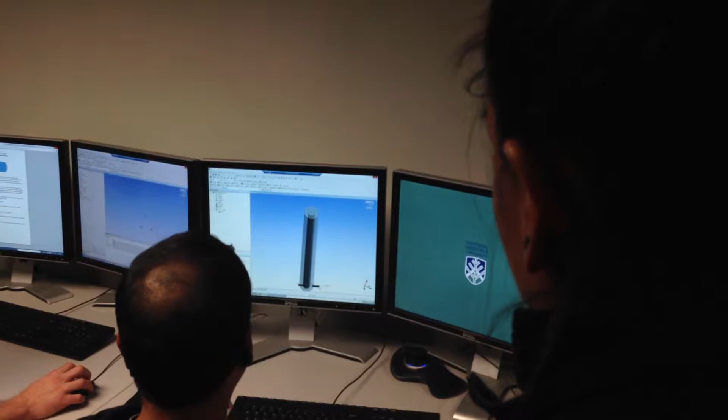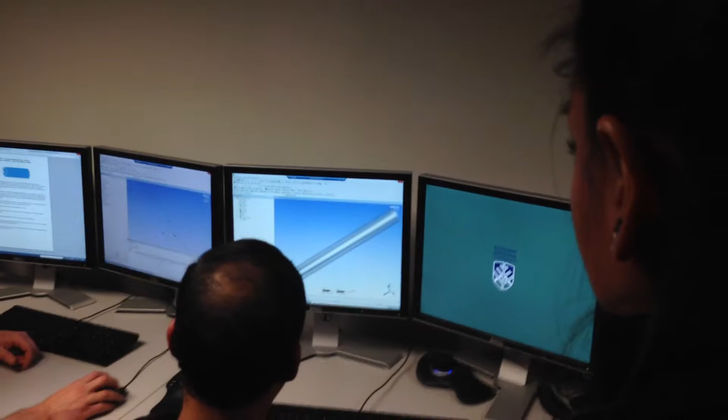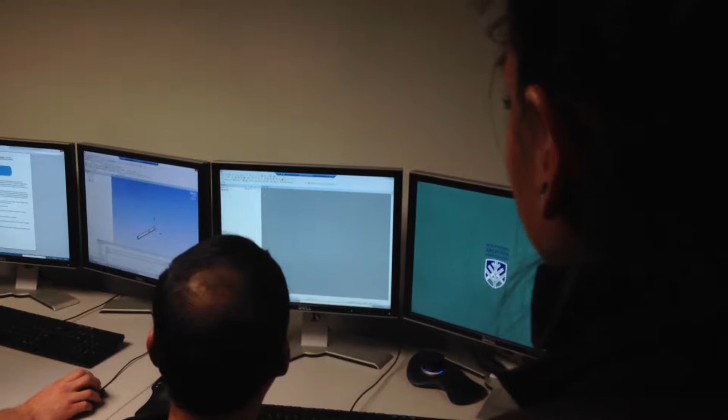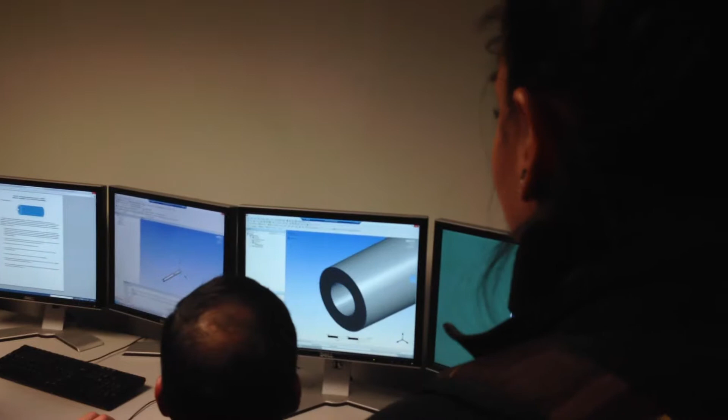Anyways, so our kind of introduction... bad view angle? No, I can see it perfectly. The introduction should be, that's what we do. Yeah, there's a competition, it's so easy when you do everything.

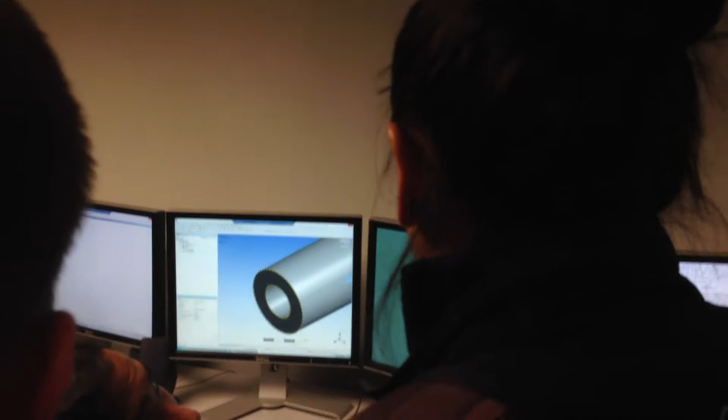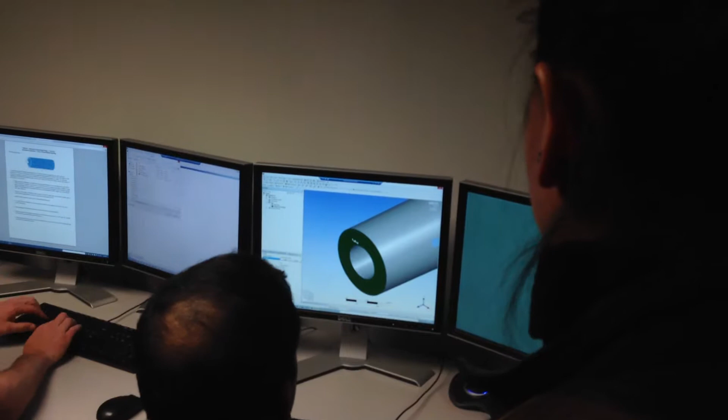And then for the mapping, I select this face. Okay, so you do that. And say apply.

All right, so I'm doing the Fluent one. So choose the double precision.

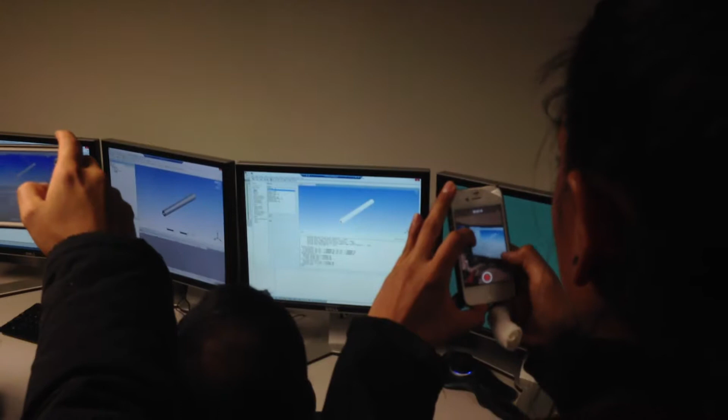Check the mesh just in case. In the models, use the energy model, energy equation. For the materials, you have to add copper. Go to the Fluent database for the solids, there is copper already there. So copy the material, but you have to change the thermal conductivity to 50. So 50, change, close. Then you can see copper and aluminum both coming in here.

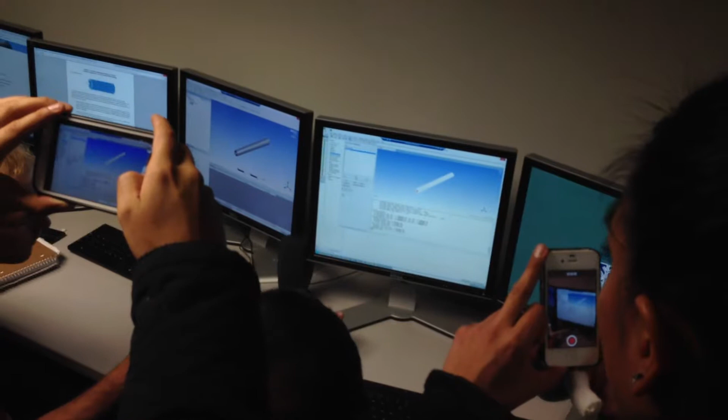And then you have to go to the cell zone conditions. You have to have two materials in here, a solid and fluid separately showing here. If you did not define them as two different materials in your design itself, it will just show up as one single material here. So you have to do that on the design side before even doing the meshing.

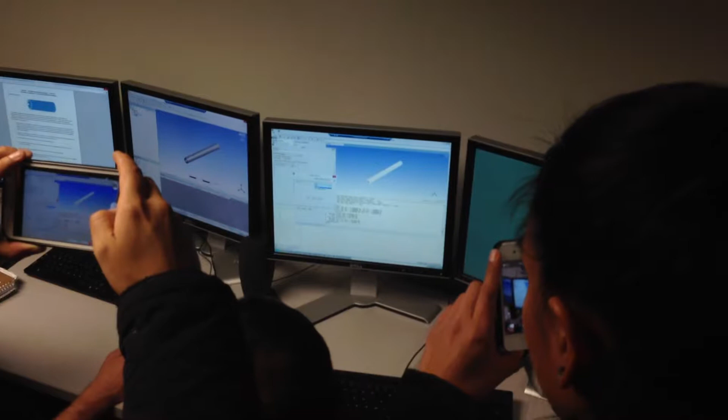So for the solid, we have an internal heat generation which we define here. Edit this thing and make sure you select copper, not aluminum. And then if you click on the source term tab, it gets activated. Edit, create one source term at a constant value of 5000 watt per meter cube.

For the channel, the default material is already air and we don't have to modify anything. So just leave it like that.

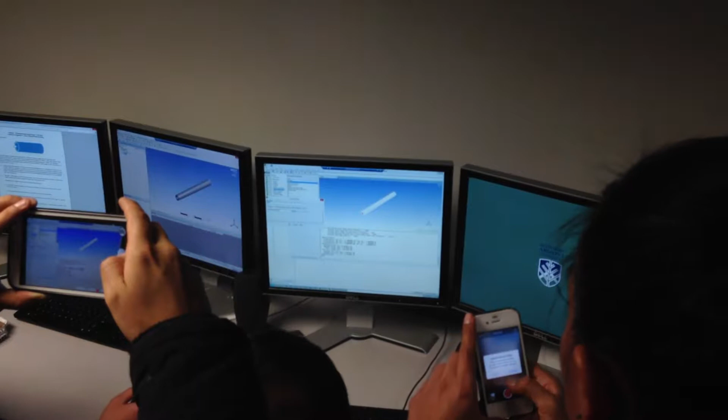The boundary conditions, the only boundary conditions you have to give is inlet, which is 0.05 meters per second at a temperature of 298 Kelvin. And the exterior, where you are defining the convection, 10 watt per meter square Kelvin, free stream temperature of 298. You should not define the heat generation here, this is the boundary heat generation. This is not what we want.

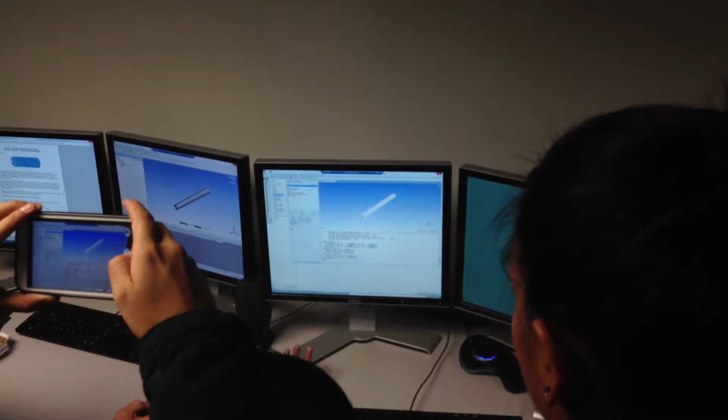Everything else is automatically taken care of, you don't have to change anything. The default values are already in there. And then the next thing is looking at the monitors, changing the residuals to 10 power negative 6.

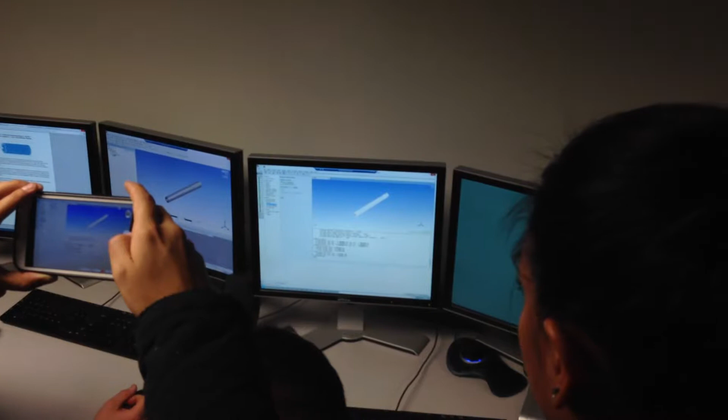The energy residual is already at 10 power negative 6, so you don't need to worry about that. Initialize the solution with standard initialization from the inlet - you can see the inlet values. Then run the calculation, using about 200 iterations. It usually converges within 160 or 170 iterations.

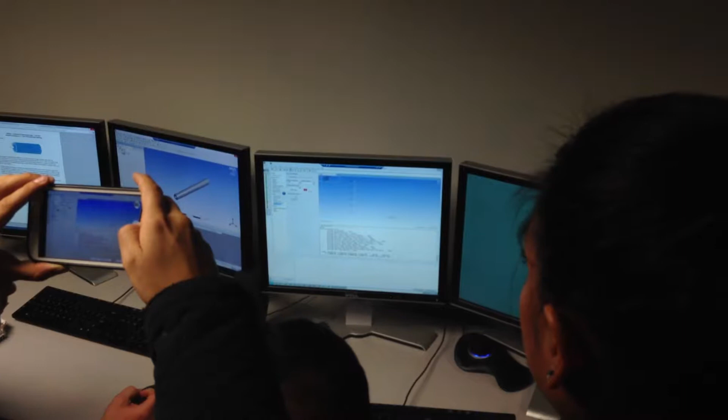Well, it's only been a few iterations, it's not there yet. That's what it's like - oh no, that's fine. It's not supposed to be that close, but...

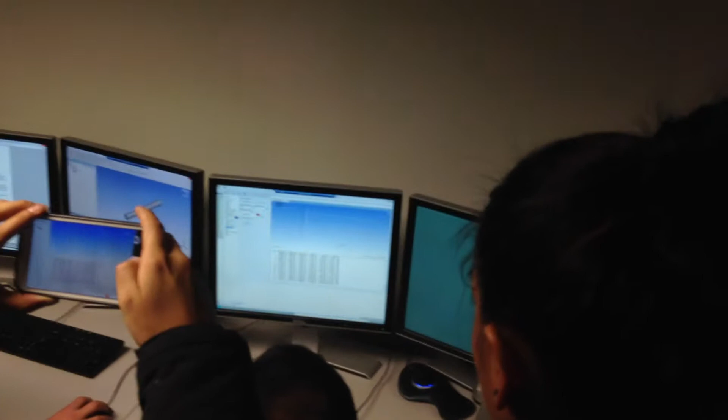You want to make it state of the art. I'll just wait until it reaches 10 power negative 3, not 10 power negative 6, and stop the calculation. But you have to make sure that the solution is converged - all these lines will go below 10 power negative 6, and that's where the solution stops.

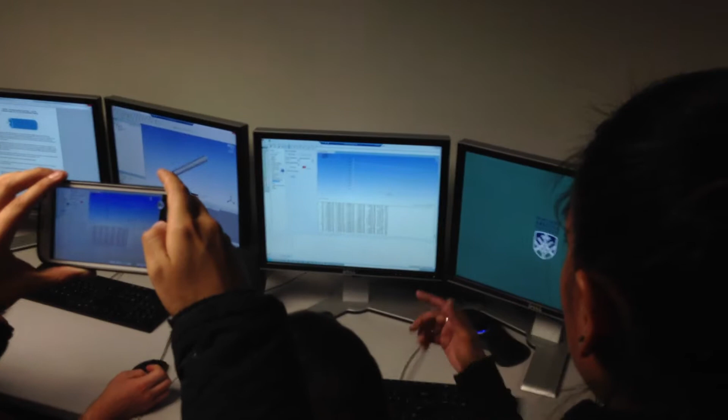So basically what the software is doing is trying to calculate the conservation of mass, conservation of momentum in 3 different axes, and conservation of energy in every element, making sure the errors fall below 10 power negative 6. That's why it does multiple iterations for each calculation.

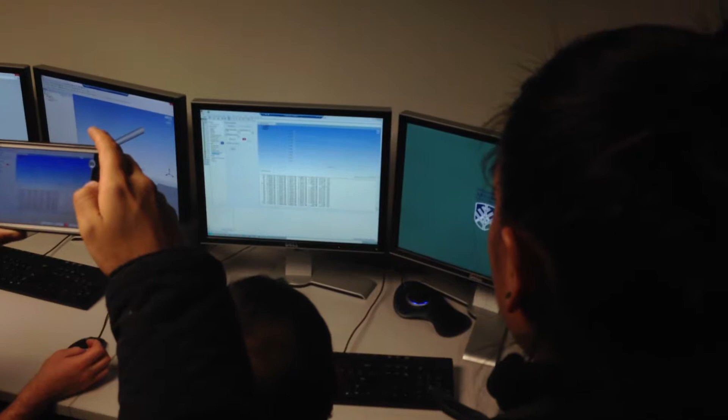One more thing - if it so happens that the solution just continues without going down, becoming like a flat line, something is wrong and you have to stop it there, or else it will never converge. But right now you can see the numbers going down, so just let it continue.

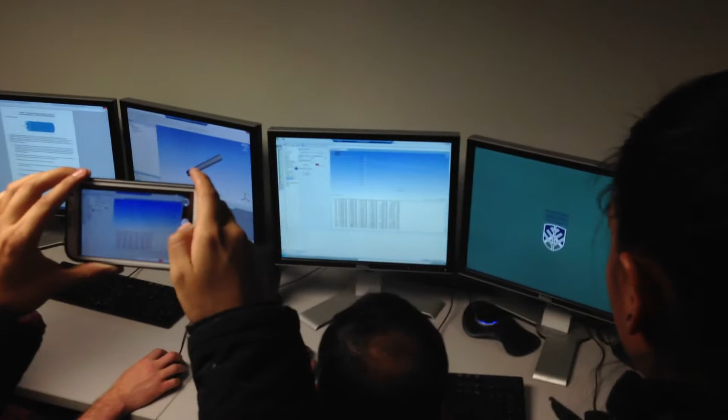Alright, I'll just stop here. I'm assuming the solution has converged. The next step you have to do is look at your solution using graphics and animation.

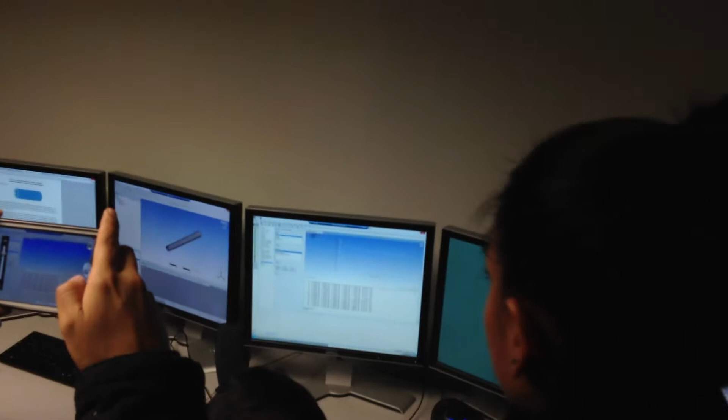Remember, this only gives you good pictures, but it doesn't give you any quantitative results. So if you just want to see how the profiles look, set up your contours, and if you're interested in the temperature profiles, select temperature. You can use the filled in option and select which objects you want.

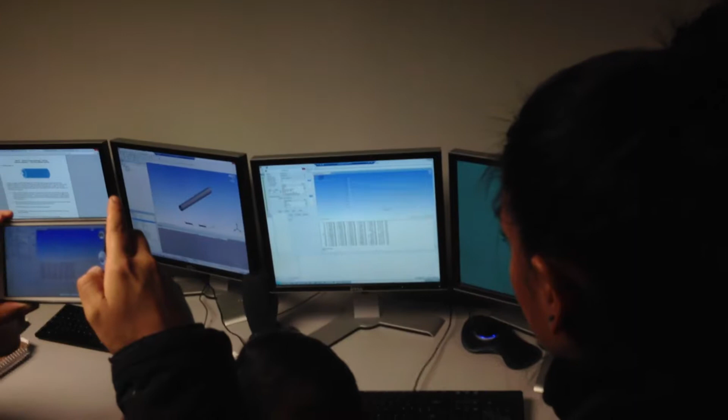The first tab selects all of them, and the second one unselects all of them. So if I'm only interested in the channel or only the solid, I can select only the channel and ask it to display - it will show only those profiles on the display.

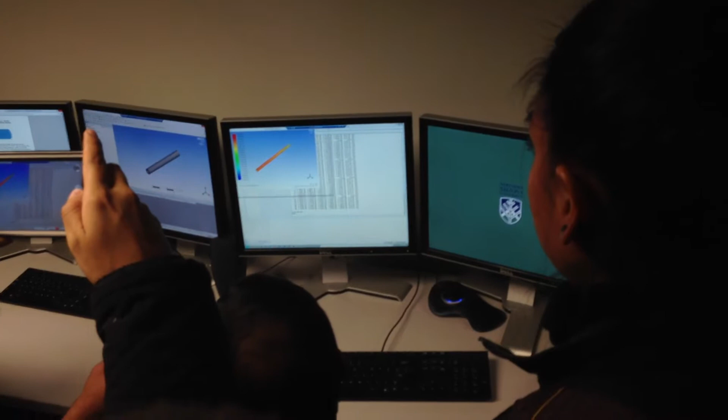There is one way you can maximize this view. If you go to view and unselect the embed graphics window option, it will create a bigger window. You can maximize this and take a good screenshot of it.

So if I select all of them and ask it to display, this is what the temperature looks like. Essentially it's telling us that this whole cylinder is pretty much at the same temperature - it's almost behaving like a lumped system.

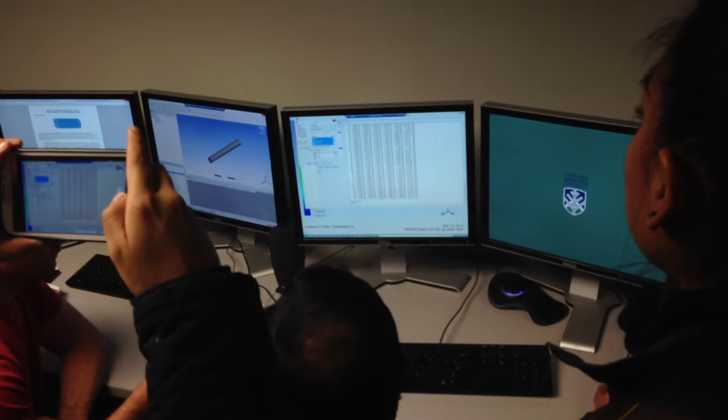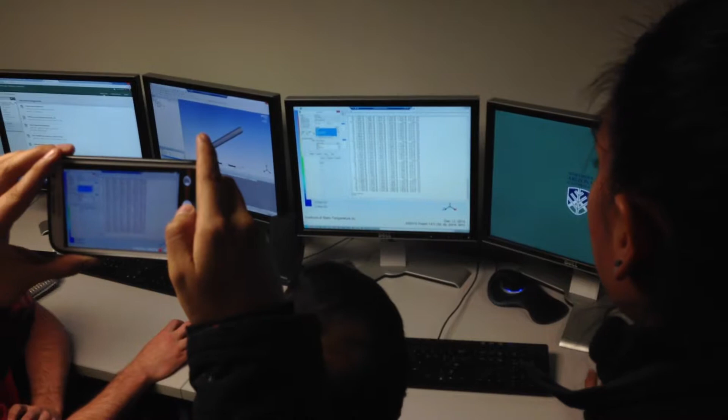In the example I gave you guys, I showed only one plane where the temperature profiles are defined - the middle plane. If you want to get a picture like that, you have to create that particular plane. Right now we don't have that middle plane.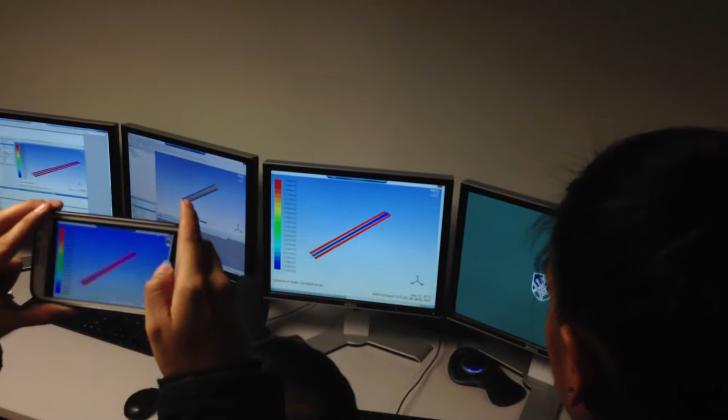So unselect all of them and just select the mid plane and ask it to display. You can see the temperature profiles coming only on the mid plane. And in my example, I also have the whole cylinder shown as an outline.

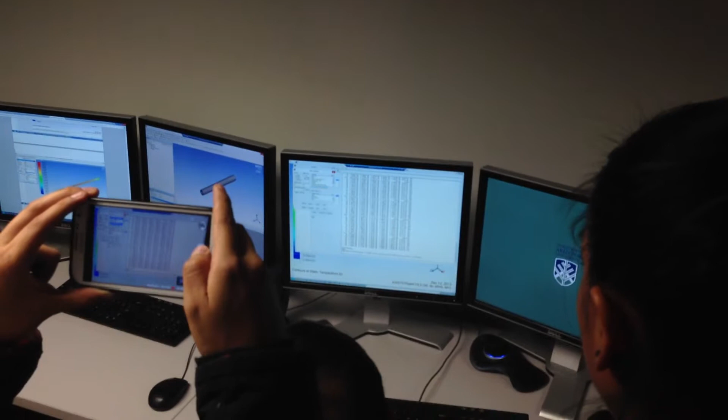You can create that also in your Fluent setup. In order to do that, you select draw mesh, and when you get the meshing window, select outline and select only the exterior.

Basically I'm selecting all of them and unselecting the ones I don't want. So I'll select the main big ones and ask it to display once - it will show you how it's going to look.

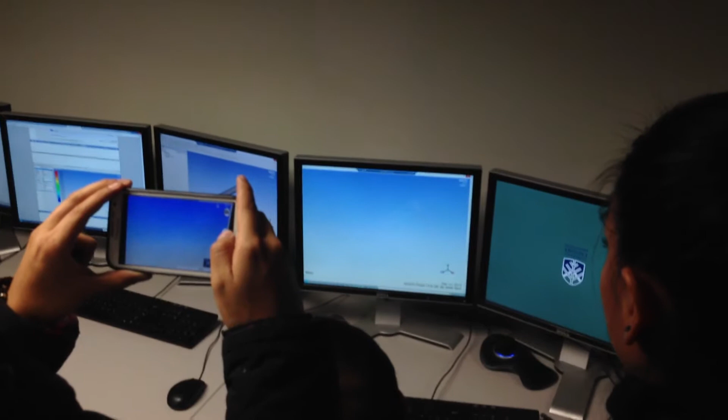You can modify it if you want, but if I'm satisfied with this, I'll say close and go back to the original contour window and ask it to display by keeping this one checked in. So it will show the cylinder as well as the temperature profiles you want - good for taking a good snapshot.

Similarly, you can also draw the velocity vectors. So I'm drawing the velocity vectors in the channel - that's all I have. There are too many velocity vectors in here.

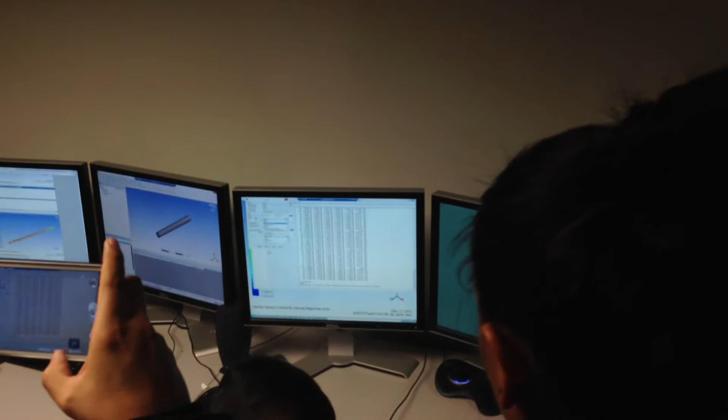There is a way we can modify that - you can skip some of the vectors, say skip 10 of them. It will be slightly better, but you can skip more if you want, say skipping 50 of them. I can also scale these images.

In scaling them, I have to go to the vector options, ask it to make a fixed length, and play with the scale head. I'm just choosing a random number of 0.3, apply, and come back here.

If I just leave it as 1 and ask it to display, this is what happens - too big vectors coming in there. So you can reduce the size by scaling it to say 0.25.

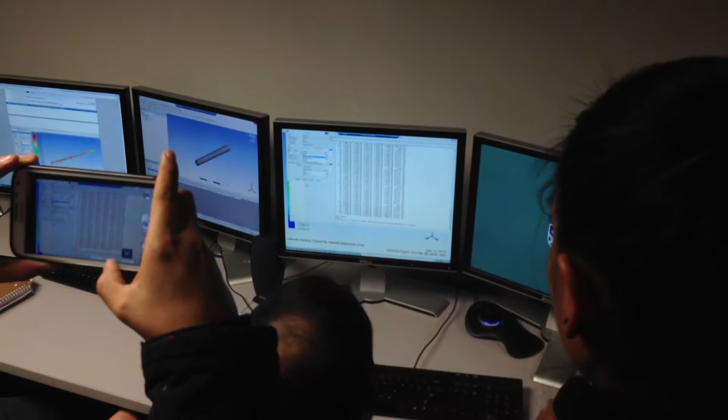Maybe they are still big. Yeah.

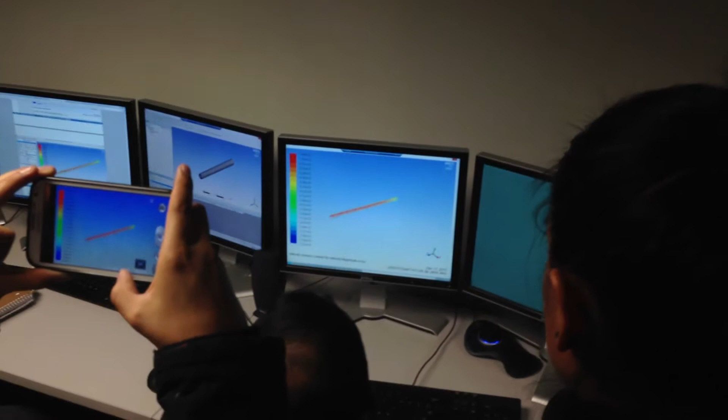So this is slightly better, but you can maximize these things, like this one here. Embed the graphics window.

So anyway, you can play with the vectors options also. But the last thing, which is where you collect the data, this is what the plots do.

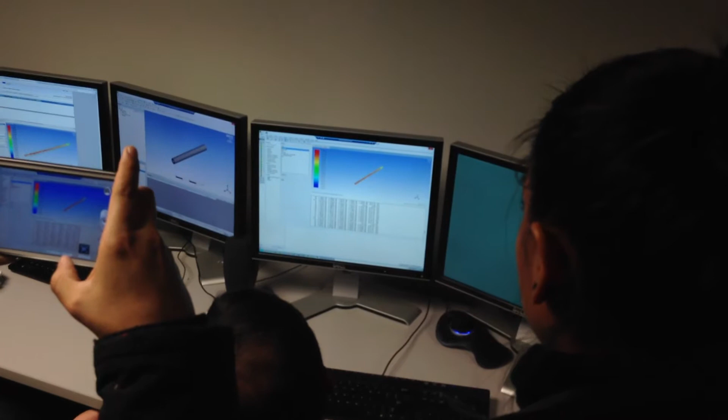So you can select the plot in the XY plot, set it up, and I want to measure the temperature profiles at different radii. So choose the temperature, and remember you are trying to measure in the axial direction, which is in the Z direction in this particular geometry.

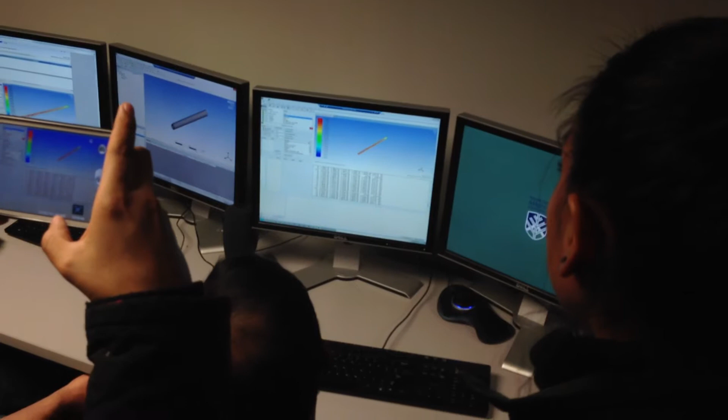So your Z has to be 1. And then I want the temperature profiles at different radii.

That means different lines along the axis. I have to create those particular lines. I'm creating the lines using a line command here.

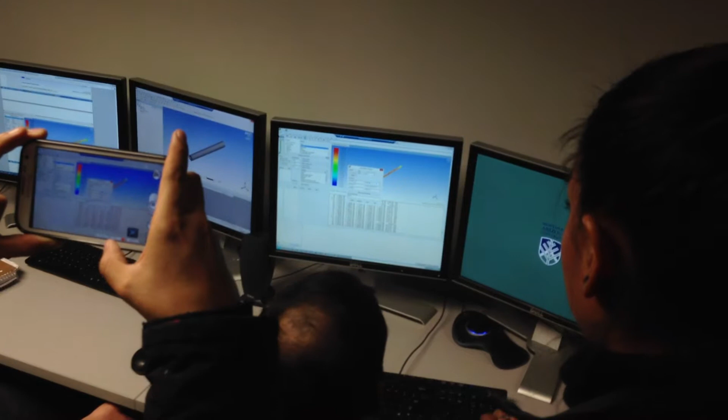So starting at a radius of 0.25, y point is 0 and 0, a radius of 0.25, y point is 0, and length of 10. I'm just calling it line 25.

Create. Similarly, you can do for 375 also. line 375, and 5 - do it one after the other. Line 5. Create. So once you've created 3 lines here, just look at the plot.

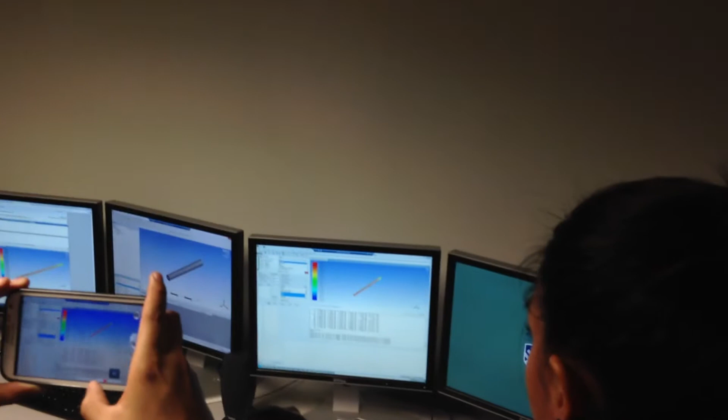You can see the temperature profiles going in, but right now you're not seeing any values there - it's just like a plot. You can leave the plot as it is, but if you want the values, a better way of doing it is to write to a file and ask it to order the points.

Writing the file, it's just like writing down an XY file. Just give some name, so lines, okay, and save to your desktop.

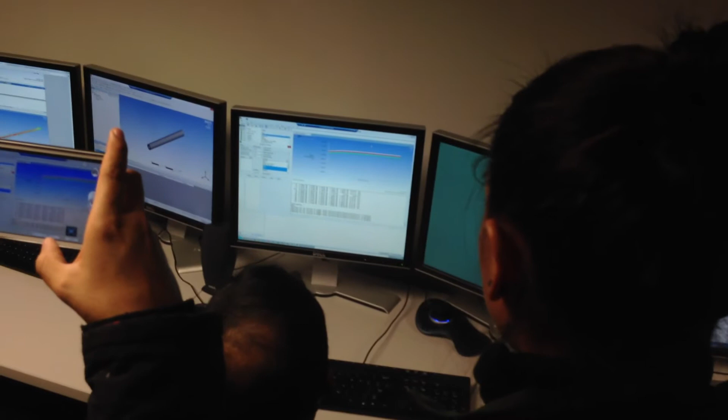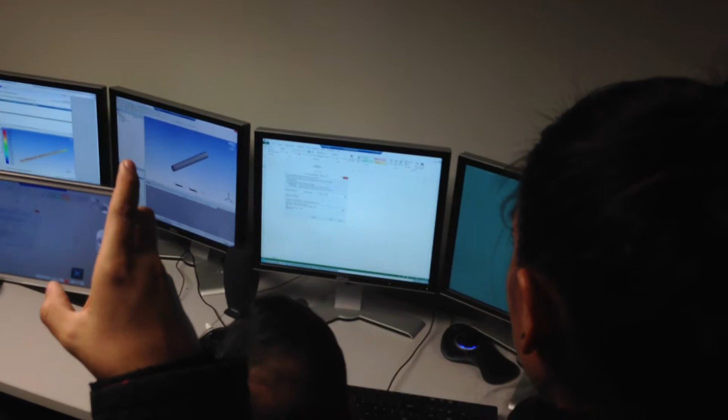Use Microsoft Excel to open this thing. Computer, desktop, all files, lines, open, delimited with a space.

Next, finish. Then what you can see here is the coordinate towards the Z direction from 0 to 10 as it is increasing, and right next to that the temperature values. They are already ordered there. The first one is at 0.25.

Oh, come on. Dual monitors.

Anyway, so you have all 3 lines of data already in your Excel file. You can modify this data, put it into the correct format, and make your own graphs also. I strongly recommend against using the Fluent graphs - they don't give any information. They have unnecessary big squares coming in there, like for example that line is too thick and almost like they're too close. It's not giving any information.

One more thing you can do: plot these 3 lines using Excel or MATLAB between 0 and 10. But most of the important information is in the beginning, so try to draw from 0 to 1 in a separate plot right next to that, showing how these temperatures are increasing between 0 and 1, because that's where most of the action is. After that, it's pretty much flattening out. Alright? So do the same thing for different radii also.

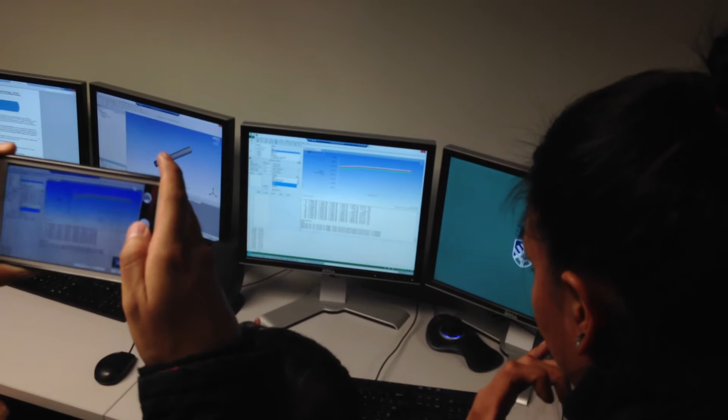Not radii, but different - what else did I ask besides this thing? Is it only the temperature profile I asked? 3 different radii - that's what we just did. It's like 0.5... You got one thing where it's set, and the other thing...

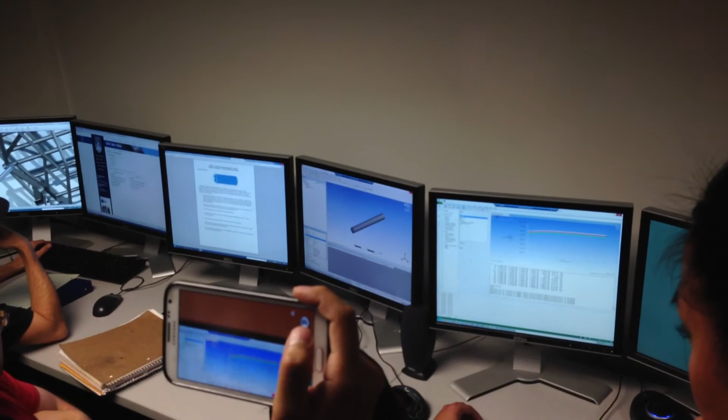It says something about 0.25, 0.375, and 0.5, and here it says 0.5, but yeah, that's a typo. It should read the same radii as on the top. So you want the ones that you entered, the 0.25? Yeah.

So there is one more thing: right now this graph is not normalized. So you have to extract the data into the Excel file to normalize the data. Okay, so how do you normalize this thing?

So if I have data like this, I can normalize it using B5/298. I'm just normalizing with respect to a free stream temperature of 298. So I can go like that.

Okay? So all of them should be just right above 1. That's what you have to do in the normalization. Could you repeat the process, the normalizing?

Once you get into the Excel file, right next to the temperature values, divide each temperature value by 298, which is the free stream temperature. Then you get a normalized value just right above 1, and then we graph the normalized one. Is it clear for everyone?